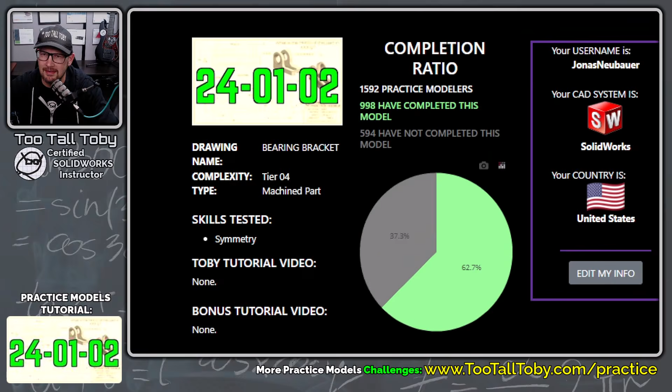In today's SolidWorks intermediate tutorial, we're going to take a look at tootalltoby.com. We're going to log in and head on over to the Practice Models app. Once we go into the Practice Models app, we can see here in our last video, we completed this Tier 1 challenge. Well, in this video, we're going to complete this Tier 4 challenge. So I'm going to click here to practice. I can see that 998 people have completed this challenge. Let's see if we can become number 999.

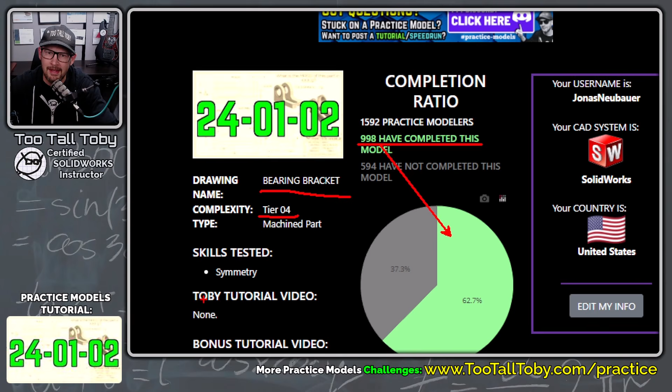The challenge is called Bearing Bracket. It's a Tier 4 part, and some of the skills tested are symmetry, so maybe we'll do some mirroring. So I'm gonna scroll down to the bottom here, click here to begin, and then click this button that says reveal drawing. We see here we've got a field for mass, we've got the clock running, and it says, what is the mass of this part in grams? So that is the question that we're gonna try to answer.

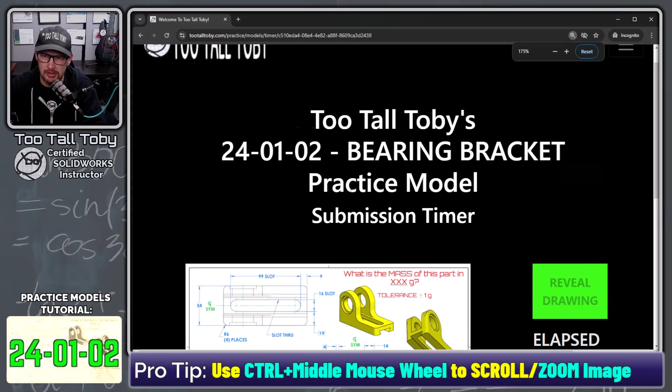Now to make this a little bit bigger, I'm gonna hold Control and scroll wheel in a little bit here, make that print a little bit easier to see. And let's take a moment and come up with a game plan for this model. I know that the clock is running, but I think it's really important whenever you're going from 2D to 3D to come up with a basic game plan.

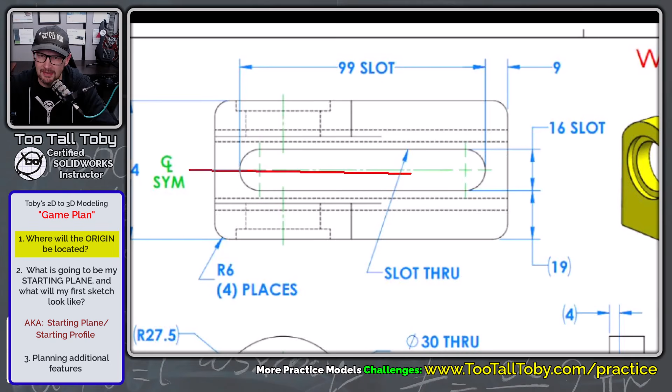So the first thing we're going to ask ourselves is, where should the origin be located for this model? In the case of this model, we've got the center line symmetry going through here, so the origin is going to be somewhere along that center line. Looking at this front view, it's safe to say that the lower corner of this front view is down here. There's a lot of dimensions coming from that location, so that's probably a good location for the origin.

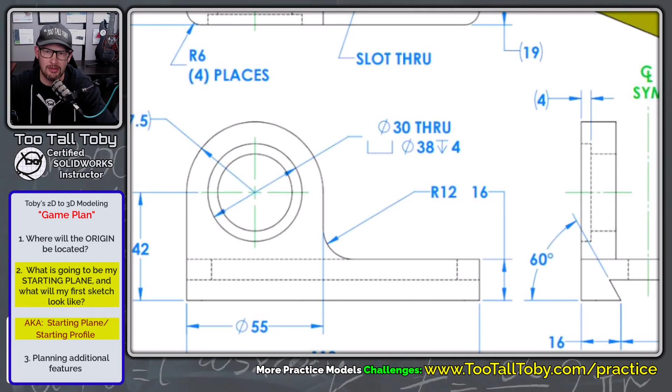The next question you're going to ask yourself is, what is going to be my starting plane and what will my first sketch look like? A lot of times we call this the starting profile. In the case of this model, I think there's two obvious choices. The first choice would be to create a sketch that looks something like this, and then extrude that sketch along the part. The second choice would be to create a sketch that looks like this, and then extrude that sketch up. So that would be a rectangle which is 54 millimeters by 118 millimeters.

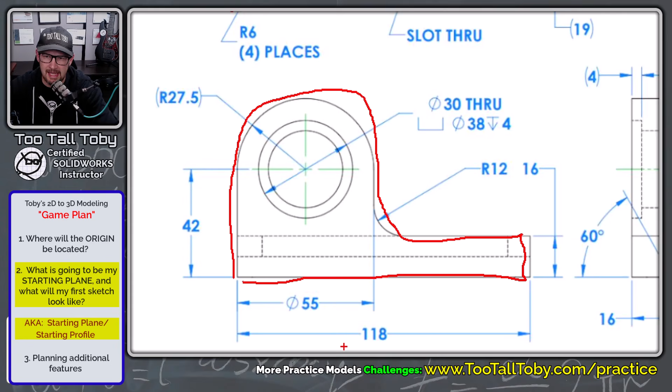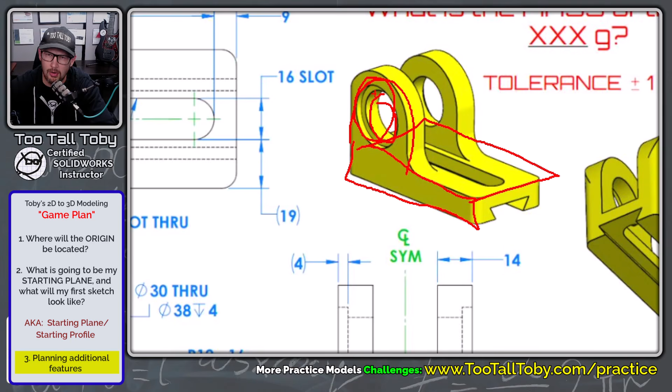The reason I mentioned those dimensions is because that's the route I'm gonna go. I'm gonna create this base shape first. Then I'm gonna create this tombstone shape sticking up here. After that, I'm gonna create this hole and then this counterbore. Then I'm going to take the tombstone, the hole and the counterbore, and use a mirror command to mirror that across.

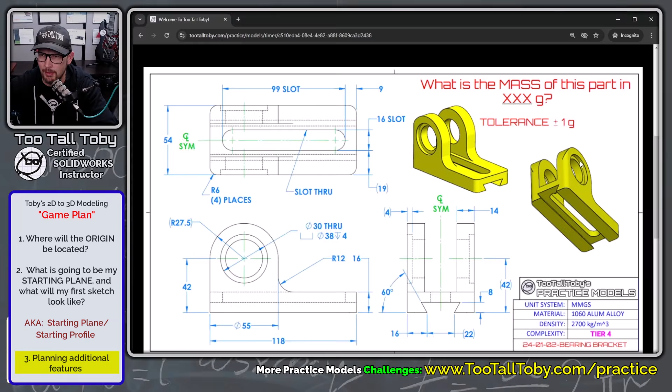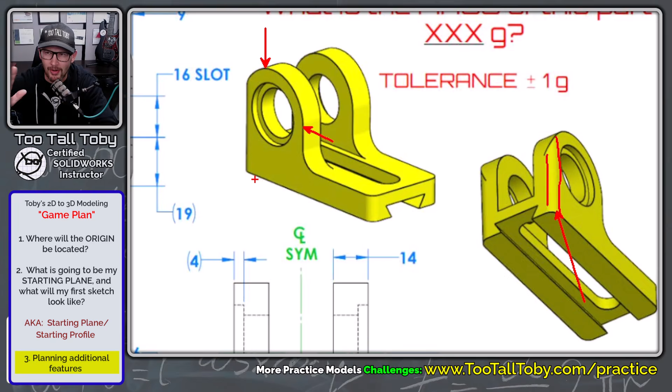Next, I'm going to add my cut extrudes: a cut extrude down here and a cut extrude here for the slot. The final features will be the fillets. These fillets are a little bit tricky, because we've got a fillet running up this sidewall. It starts here and runs up this sidewall, but then it just stops, and this remaining edge is sharp, and this edge here is sharp. In most CAD programs, that's going to be a challenge because of what's called tangent propagation in the fillet command. But we'll talk about that once we get to that part.

We've already burned off 2 minutes and 30 seconds talking about our game plan. So let's take this print and move it over to our second screen. Let's get into SolidWorks. I'm going to be using SolidWorks 2022 with a fresh install, so everything is pretty much out of the box.

Nothing has been customized, and I'll kind of talk through what I'm thinking as we go through this challenge. So here we go. We're going to begin a new part here. We can either use the novice or the advanced function for our templates. I'm going to use the advanced function. I'm going to double click on my part template here.

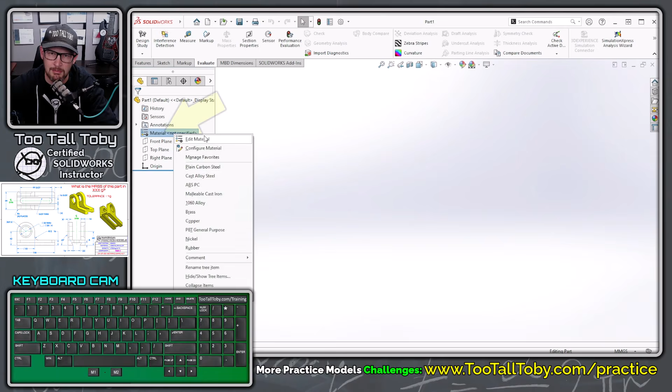Next, I'm going to go over to the tree and set my material. So in the title block, it says the material is 1060 aluminum alloy, and it says that the material has a density of 2,700 kilograms per cubic meter. So I'm going to go into my aluminums here. I'm going to choose 1060 and just confirm that the density is matching the title block, and it is. So I choose apply and close.

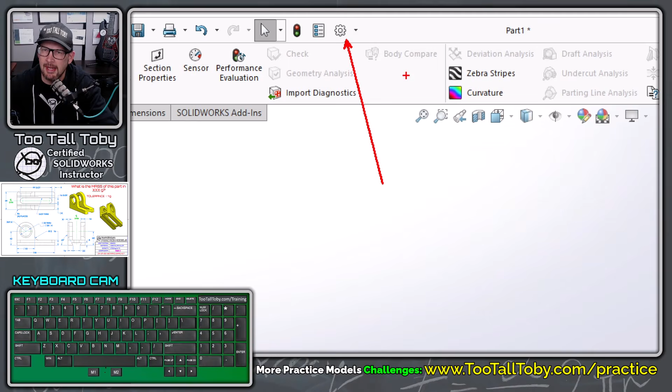And then the next thing I'm going to do is go up here to my options. Because I'm just working from the native template, I'm not sure what unit system I'm using. So let's go into options here. We'll go document properties, units, and the units here are MMGS. And that is good because this model is in millimeters. So I'm going to use MMGS here.

Now I am going to go a little bit faster on this tutorial than I went on the last one. So just feel free to pause or maybe play it back at half speed or something like that if you're struggling to get caught up. I just don't want to take too long on this tutorial.

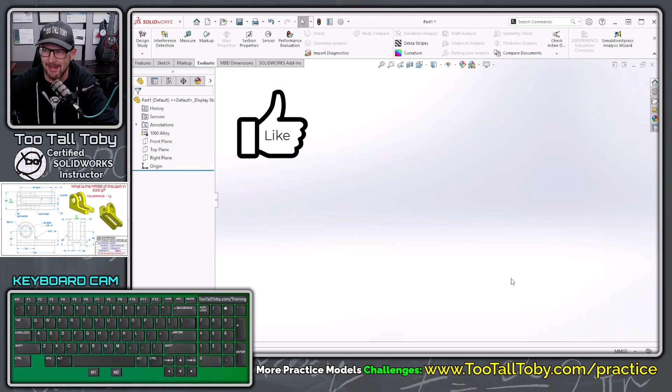So now I'm going to go to the top plane. My starting plane is going to be the top plane, begin a sketch. And I'm going to start out by sketching a rectangle like so. And then I'm going to go up and choose Smart Dimension. And once I choose Smart Dimension, I'm going to choose to dimension this line here at 54 and this line here at 118. That's what we talked about in our game plan.

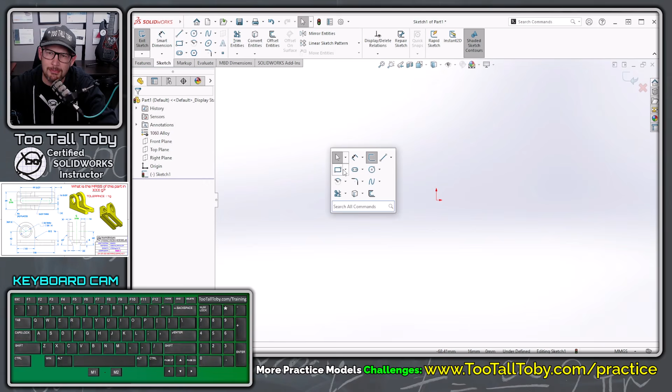Now, I just want to point out one shortcut here that I use all the time. So let me delete these dimensions. Let me delete this rectangle here. And that shortcut is the S key on your keyboard. So I press S on my keyboard and this menu shows up. And you can see in this menu, I can choose rectangle and then I can create a rectangle. And then I can press the S key again. And once I press the S key again, I can jump into Smart Dimension. And I can drop a dimension on here of 54 by 118. So another dimension here, 118.

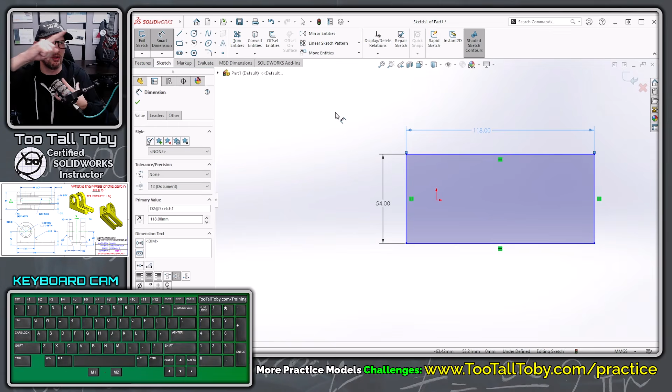So I'm going to hit escape here. And now I'm going to add a sketch relationship between the origin and this line here. And the way we add sketch relationships in SolidWorks is we pick one entity like the origin, then we hold control, then we pick the second entity like this line here, then we let go of control, and then we choose the relationship up here in this box.

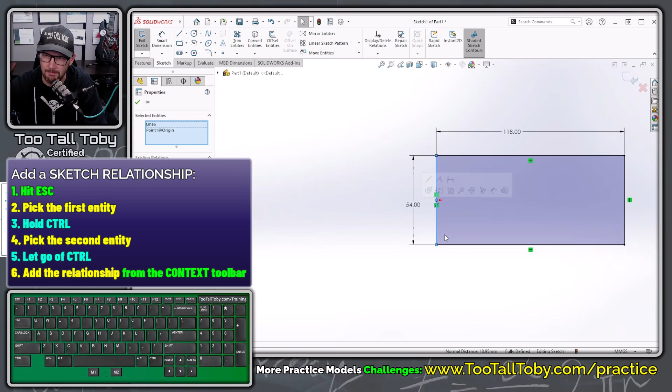So let me just show you that one more time. I'm going to hit escape. I'm going to pick the first entity, hold control, pick the second entity, let go of control, and then I'm going to come up here and choose make midpoint. And now that sketch is entirely black, which means it is fully constrained, which means we are ready to turn that sketch into a feature.

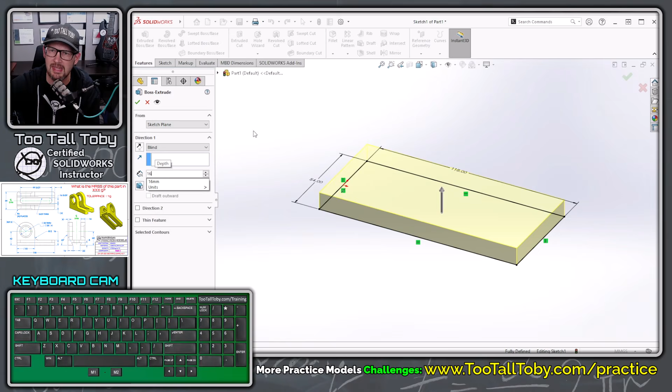So I'm going to choose features, extruded boss base. And we can see over here that the height of the extrusion begins as a highlighted field. That's another little shortcut that I use. If I'm in a sketch and I choose extrude, I can immediately let go of my mouse and then I can type in the height of the extrusion, 16, enter, enter. And now I'm done with that command.

So now I'm going to move on to my next command, which is going to be this tombstone shape. So I'm going to select this face, begin a sketch, orient my view, and then I'm going to use the line command, and I'm going to create a line that starts here at this corner, this kind of upper corner.

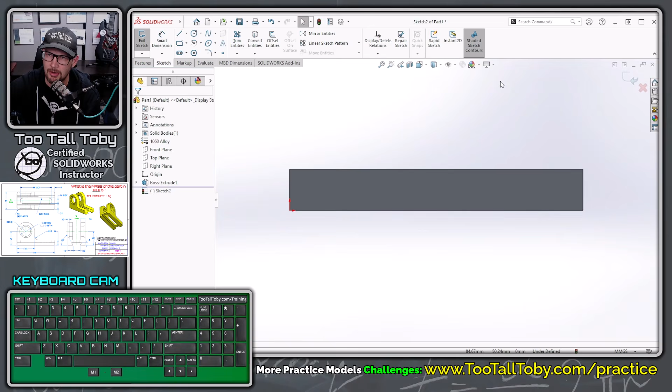I'm going to move my mouse up here. Actually, let me just hit escape here. I'm going to go into my view options, my view display options. And I'm going to turn off RealView graphics and shadows in shaded mode. And I'm also going to go into my scene option here and make this plain white. I think that'll make it a little easier to see where I'm clicking.

So I'm going to go now to the line command. So S key, line, and I'm going to choose this vertex right here to begin my line command. I'm going to just move my mouse up a little bit. I'm going to single click. And then I'm not going to click anything. I'm just going to move my mouse back over that end point. And this is a shortcut in SolidWorks where you can transition from a line to an arc.

Now, depending on the direction you come off of this line, you're going to get different results here. You can see you can get tangent, perpendicular, or reverse tangent. So again, I'm not clicking anything. Let me hit escape here. The workflow is that I press the S key, I begin the line command, I pick this point here, I move my mouse up, I pick here and pick again. So one left click, now a second left click. Now I'm not clicking anything.

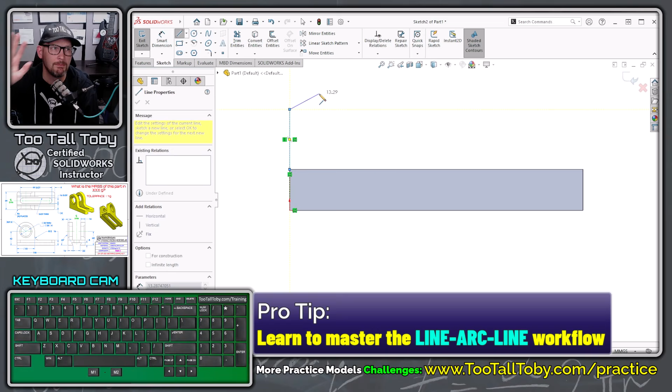I come back and hold my mouse over this end point, and now I come up and around from that end point, and you can see that I'm in a tangent arc command. So I'm going to single click here to drop that tangent arc, come straight down like this, and then come across to close off that sketch. And now I've got a nice, neatly knit, closed sketch. That is what I want.

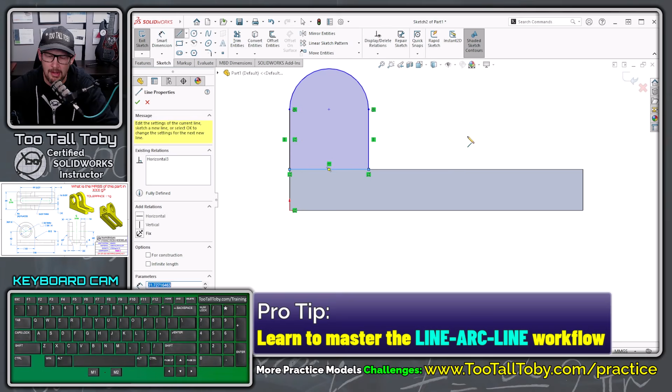So I'm going to press the S key and jump into the Smart Dimension command, create a dimension from here to here. Looks like that dimension is called out as 55. And then I'm going to create a dimension from this bottom line here up to the center of that arc, and that is going to be a dimension of 42.

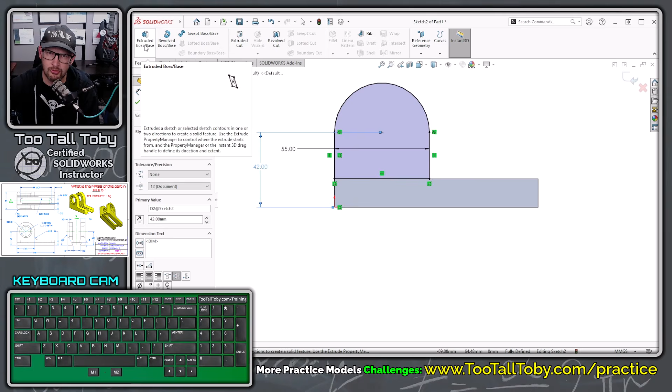And once I've got that geometry in place, I can choose Features, Extrude. And we can see here that the depth of that extrusion is supposed to be 14 millimeters. So we'll make that 14, enter. And this is going to go the opposite direction, so I'm going to use this button here to flip the direction of that extrusion. I click on this button here, and there we go. Hit the green check mark, and we are done with that feature.

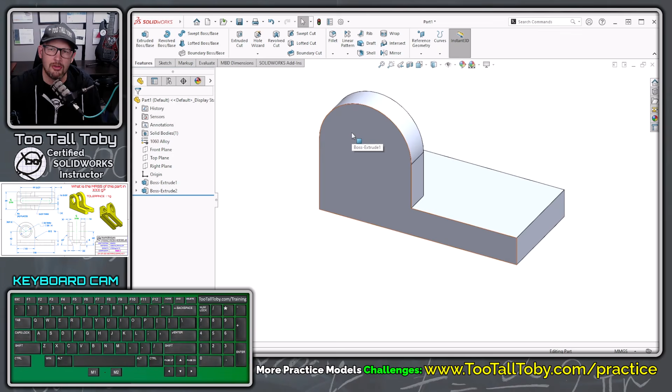Now, to create the hole that's going through this thing, I could use the Hole Wizard tool, and I could do it as a counterbore. That's probably how I would do it normally, but just in case you're still beginning your SolidWorks journey, I wanted to do this manually with 2 cut extrudes. So I'm going to pick this face here, begin a sketch, orient my view. I'm going to press the S key on my keyboard. I'm going to choose the circle command.

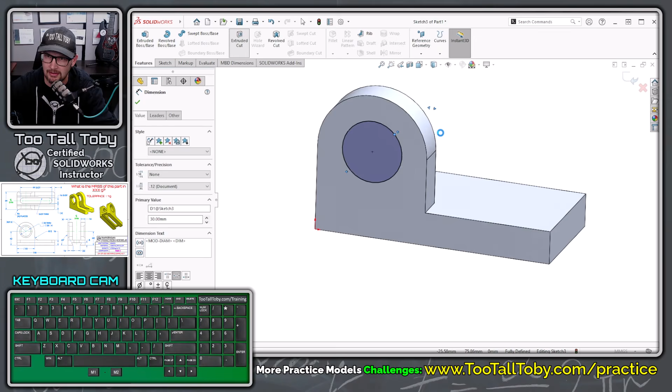I'm going to hold my mouse here over this edge, which we call waking up the center point. So after I hold my mouse over that circular edge, I can move my mouse down here to the center of that edge, single click, move my mouse, single click again, and then I'm going to press the S key and go to Smart Dimension and create a dimension here of 30, enter, and then I'm going to choose the Features command, Extruded Cut, and this extruded cut is going to be through all.

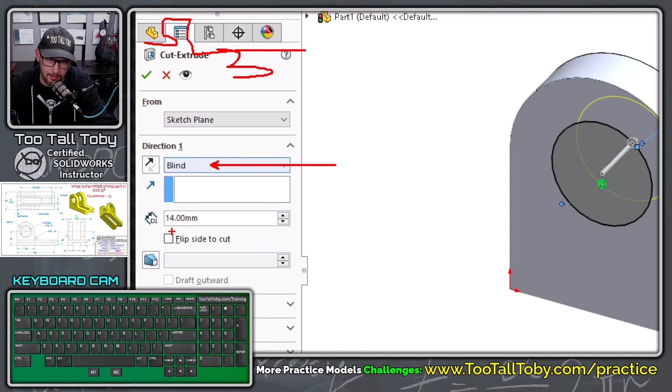So this is what's called your end condition when you're working in an extrude command, a cut extrude or a boss extrude. Here we're looking at what's called the property manager, all the properties of this cut extrude. And one of the properties is the end condition. Currently that's set to blind, which means that we type in the depth, but we're going to change that end condition to through all, and hit the green check mark. And there we go. There's a nice hole going through that entire model with a diameter of 30.

And so now I'm going to pick this face, begin a new sketch, not edit sketch, but begin a new sketch, orient my view.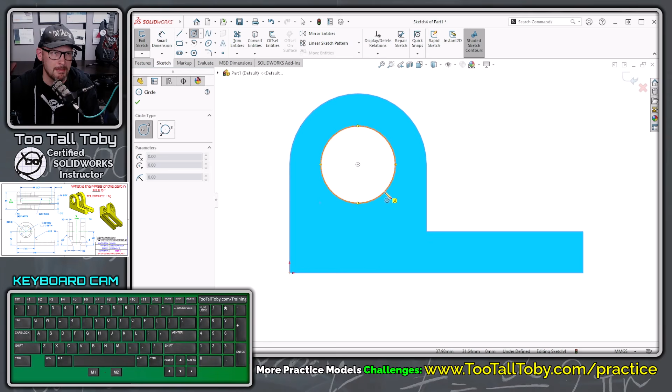I'm going to press the S key, go to the circle command, going to wake up the center point. So I just hold my mouse over that circular edge. Then I can lock in on that center point, come out here with a circle, and then I can press the S key, Smart Dimension, and put a dimension here on this circle. And that dimension is going to be a diameter of 30.9, enter.

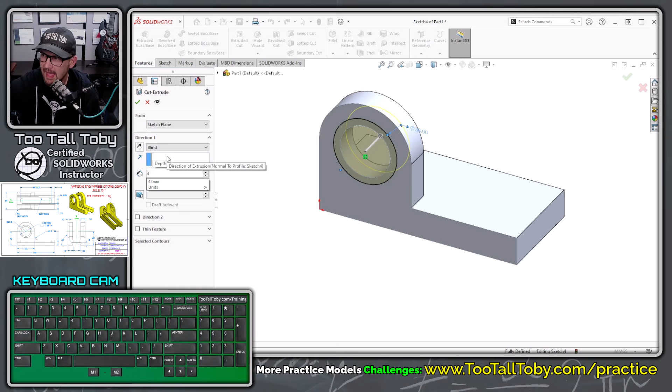And now I'm going to go to Features, Extruded Cut, and this is set to through all. I want to change that back to blind. And once I change that back to blind, the depth is highlighted. So I'm just going to type in the depth here of 4, enter, enter. And that gives me that counterbore shape, the through hole, and then the larger diameter that's only going down to a certain depth of 4 millimeters. And so now I'm ready to mirror that geometry over to the other side.

Now this is a time when it could be very useful to rename your features. Probably wouldn't want to do this in a speed run, but if you're modeling parts for your coworkers, you're going to want to rename your features. So this first feature here, I'm going to click on it. I'm going to press F2 on my keyboard. That takes me into rename, and then I'm going to call this one Rect Base, and then I'm going to click this feature here, the next feature, F2. I'm going to call this Tombstone Boss 1.

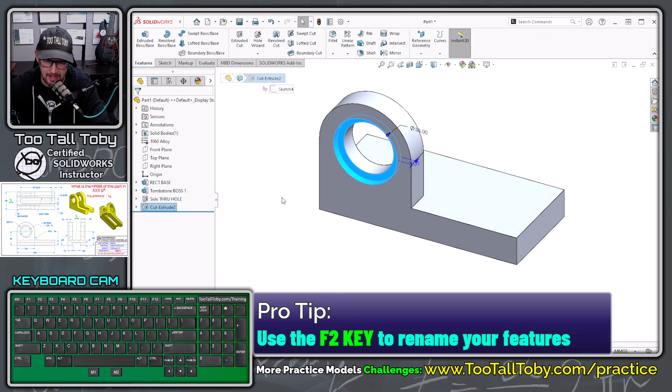And then I'm going to click on this feature here, Cut Extrude 1. I'm going to say F2. I'm going to call that Side Through Hole. And then I'm going to click on this feature down here, and I'm going to say F2, and I'll call that Side C-bore or Side Counterbore. Now you can name these features whatever you want, but it's good to name your features. It helps you, it helps your coworkers, and it's going to definitely help us now when we go into the mirror command. So here on the Features toolbar, we're going to choose Mirror.

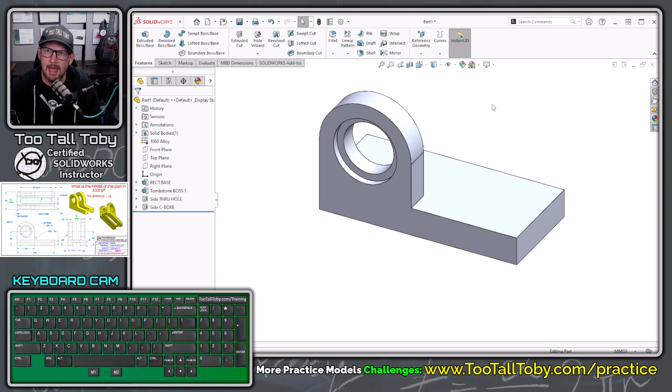And once we choose Mirror on the Features toolbar, we're going to say that our mirror face plane, I'm going to go in here to this flyout menu, our mirror face plane is going to be the front plane. Then I'm going to skip this second box here. You might not have this if you have an older version of SolidWorks. But I'm going to skip down here to where it says Features to Mirror.

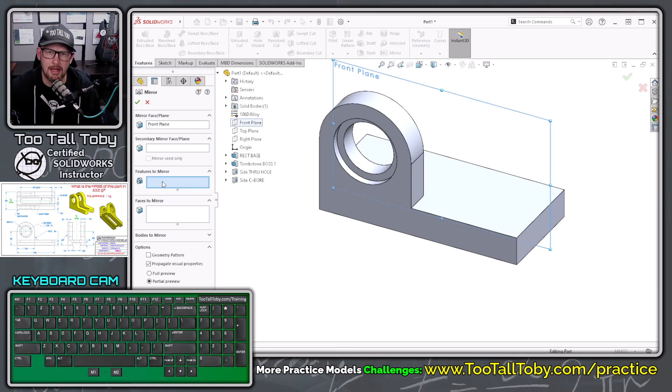And the features that I'm going to pick from the tree. And it's now very easy for me to select these features. Tombstone Boss 1, Side Through Hole, Side C-bore. Very easy to select them because of how they're named. And so I hit the green check mark, and look at that. We've created that nice mirror of those features. So now I'm ready to start adding in some more cut extrudes.

Normally the order in which you create features is your boss extrudes, then your cut extrudes, then draft if you have it, and then your fillets. So we did our boss extrude first. Now we did our cut extrudes with these holes here for the C-bore. Let's do another couple of cut extrudes. So I'm going to pick this face here, begin a sketch, orient my view.

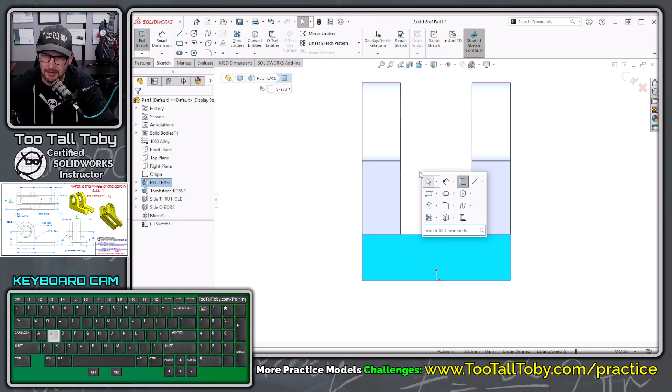Now I'm going to press the S key, begin the line command. I'm going to start here at the origin, and I'm going to come over here with a line. I'm going to come up at an angle with a line. I'm going to come back over here directly above the origin with a line, and then I'm going to bring my final line down here back to the origin. So there you see we've got a nice, neatly knit closed sketch.

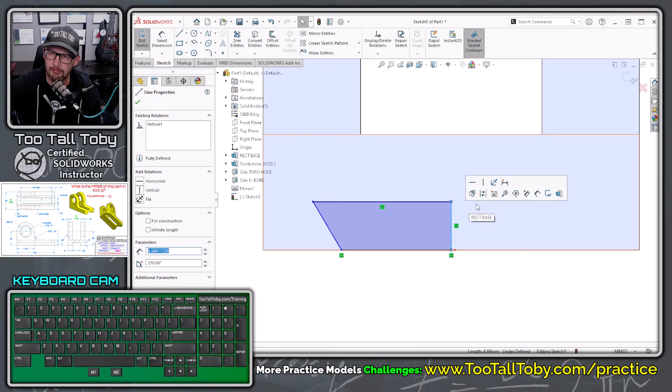I'm going to hit escape here, and then I'm going to pick on this vertical line that's coming up from the origin, and I'm going to choose to convert that to construction geometry. Construction geometry means we're not going to use this line when we go to do our cut extrude. So now the sketch is open. It's got line, line, line, but then this is not really a line here.

Well, what we can do is we can select all 4 of those lines. I usually do this with a window. So I start out over here on the left, and I just drag in the background, and I drag over here to the right. That selects all 4 of those entities, and then I can come up here to the sketching toolbar, and I can choose Mirror Entities.

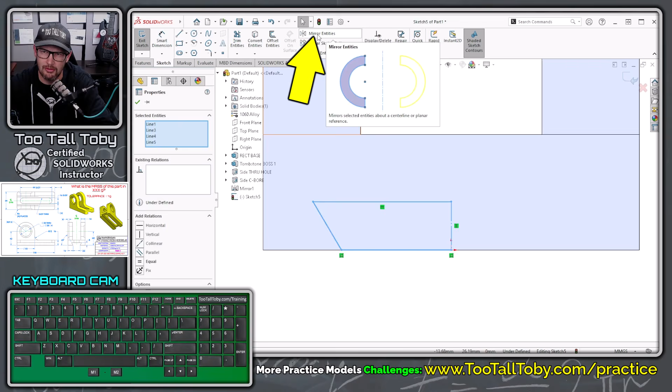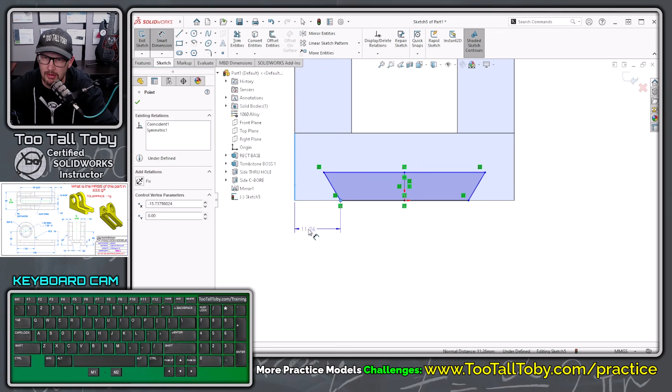Mirror entities mirrors that right across. Now we've got that sketch for that keyway that we're cutting across the bottom of this part. So for these dimensions, what we're going to do is we're going to add the dimensions here for Smart Dimension. This is going to have a distance from the edge of the model to this point here. That distance is 16 millimeters. Then if we click on this line here across the bottom, we can see that that distance is 22.

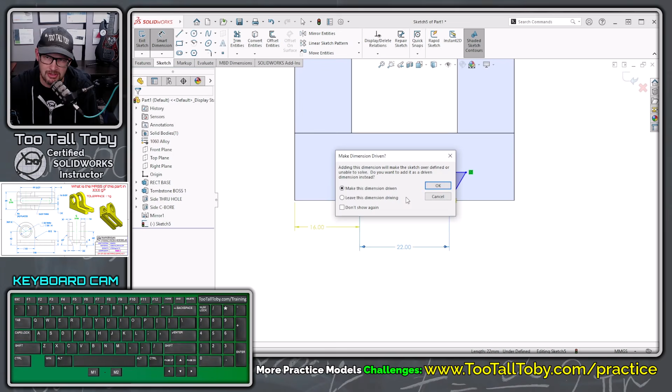Now, when we go to drop that dimension, SolidWorks says, adding this dimension will make the sketch over-defined or unable to solve. Do you want to add it as a driven dimension instead? And I'm going to say, yes, make this dimension driven. And so what that means is if I change the 16 dimension, let's say I change that to 20, then that driven dimension automatically changes. So it's kind of like a reference dimension in a sketch. It's useful for keeping track of important dimensions, and it's useful for double checking to make sure that we're matching the drawing. This is 16 and this is 22, and that's what we see on the drawing, so that is good.

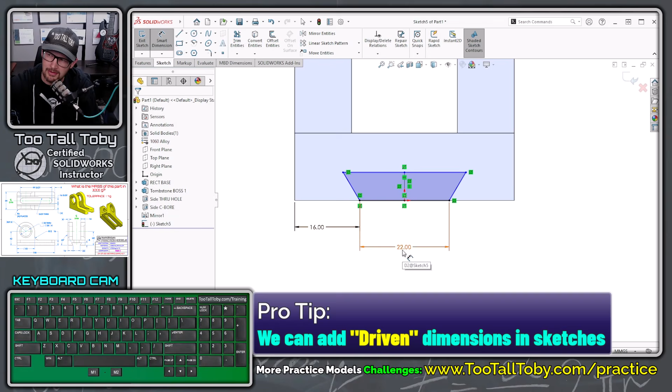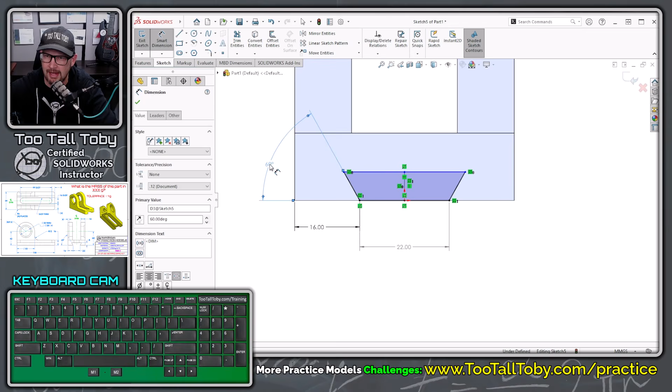And so now I'm going to create some final dimensions here. I've got a dimension that's going from this line down here to this angled line. And that dimension, I'm going to click in the background, is going to be 60, enter. And then from this lower line to this upper line, and that dimension is going to be 8 millimeters. And so now that sketch is all black or fully defined.

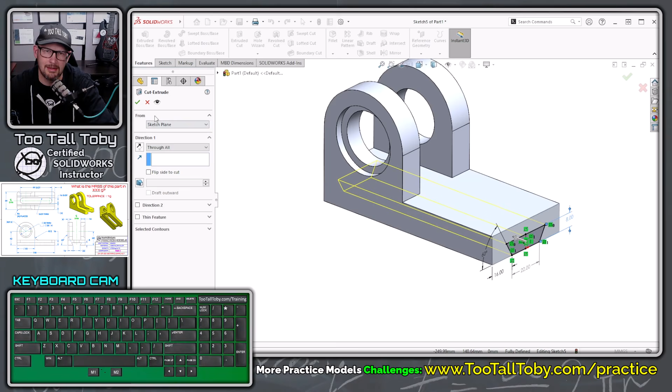That means we can jump into the command Features, Extruded Cut. So we go to Features, Extruded Cut, and the end condition for this feature is not going to be blind. The end condition is going to be through all. That way that cut goes through the entire model. And so we hit the green check mark, and look at that. That looks great. And so now we need to add one more cut extrude, the slot from the top view.

So select this face, begin a sketch, orient the view. And now we're going to go to the slot command, and we're going to create a slot here that goes from here to here. You can see I'm horizontal to the origin. So that center line is now locked down, but now I need to add my dimensions. And for my dimensions, this is kind of a cool shortcut in SolidWorks. We need to create a dimension here that goes from this edge of the model to this arc, and that dimension needs to be 9 to the point of tangency.

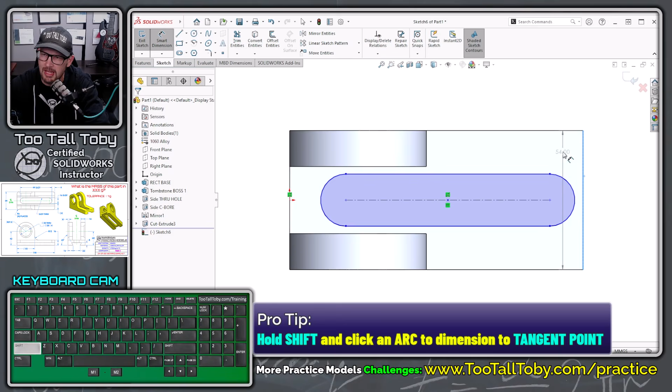So the way we do this is we begin the Smart Dimension command. You can see we're in the command here. We pick on this edge here, and then we hold Shift on our keyboard. So see, if I just pick this arc here, the dimension goes to the center. That's not what we want. So I'm going to hit Escape. I'm going to choose the Smart Dimension command. I'm going to pick this line here. Then we're going to hold Shift on our keyboard. And then when we pick this arc, look at that, we get the dimension to tangency. And that's what we want. So we click in the background and we type in 9.

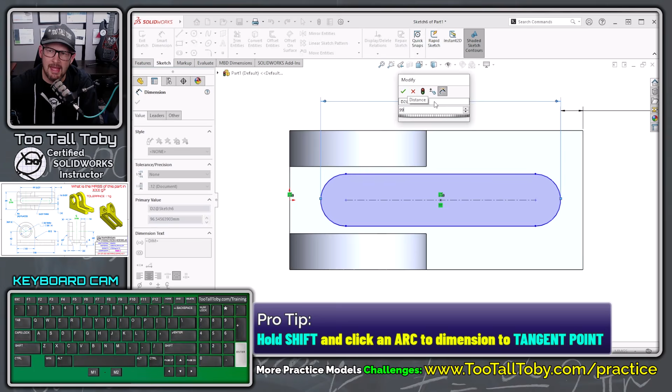And then we can hold Shift again, click this arc at the point of tangency or near the point of tangency, and then pick this arc over here near the point of tangency. And then we can let go of Shift. So I was holding Shift that whole time, click in the background, and then we can type in 99, and that's the dimension from tangency to tangency for that arc.

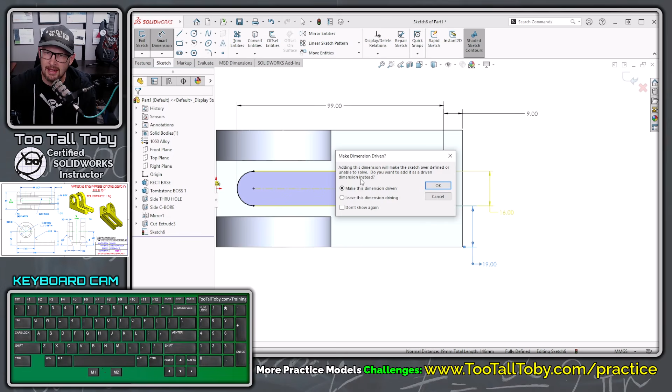And so now I just need to add that one final dimension from this line to this line, and that dimension is 16. And then if I wanted to use that driven dimension trick again, I could add a dimension from this line to this edge of the model, and I could say I want to make that dimension driven. And there we go. We can see that dimension is 19. You can also click on that dimension. And then if you look over here in the property manager for that dimension, there's a button down here, this button right here.

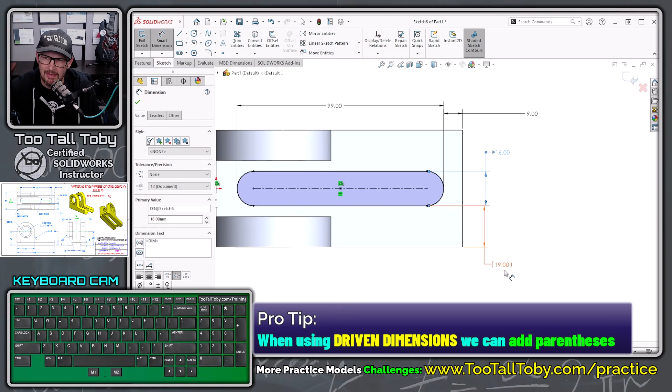It's way down here where it says dimension text in the properties of that dimension. And that button adds parentheses. So, if you wanted to remind yourself that that's just a driven dimension, that's a good way to do it. You can just add parentheses around that dimension with this button over here. So now we've got that sketch fully defined.

Let's go to the command Features, Extruded Cut. And our last cut had an end condition of through all. And so starting in SolidWorks 2022, SolidWorks remembers the end condition. I actually don't like this. I prefer the way it worked in the old days, but it's good to know what the differences are and when they happened.

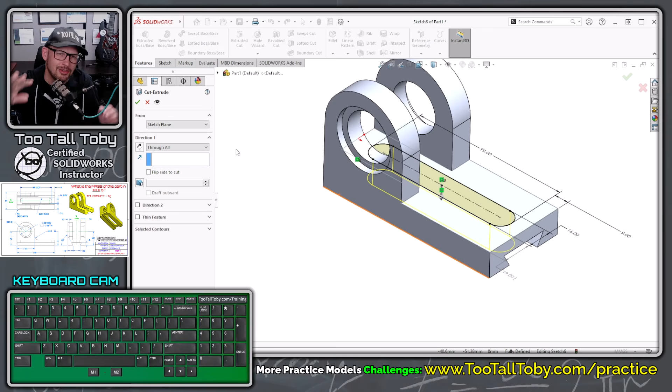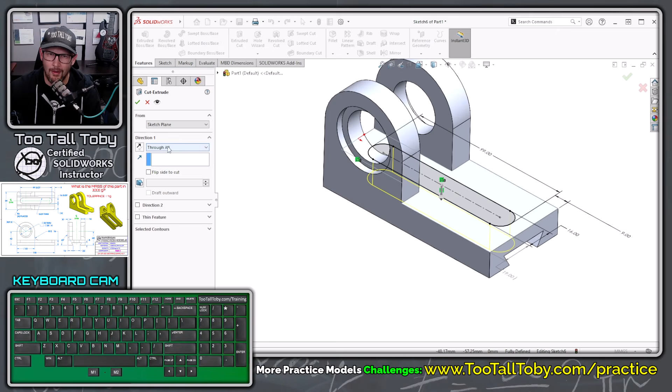In 2021, this didn't happen, but in 2022, when you pick an end condition, that end condition kind of sticks. And so now this cut extrude is also through all for the end condition. It does happen to work out this time, so we'll be happy about it. So we say through all for the end condition. We hit the green check mark, and now we are on to the final phase of the model.

And the final phase of the model is adding the fillets to this model. To add the fillets, we're going to choose the fillet command. So we choose fillet here. And then we're going to type in a radius of 12. So 12, enter, and that fillet is going to be applied here.

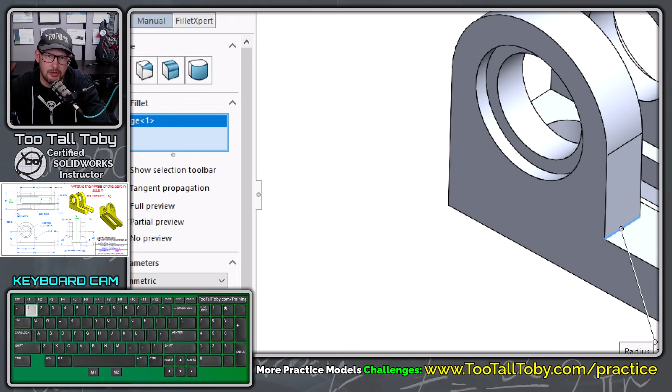And you notice I don't see a preview. Well, when you first start using SolidWorks, you have to remember to turn on full preview for your fillets. So I'm going to come over here and choose full preview, and there we go. Now we're seeing that nice yellow preview of that fillet. And then I'm going to also choose this line here, and we can see that that line is also going to have a fillet. The preview is showing us both of those fillets. That looks pretty good. So we're going to hit the green check mark.

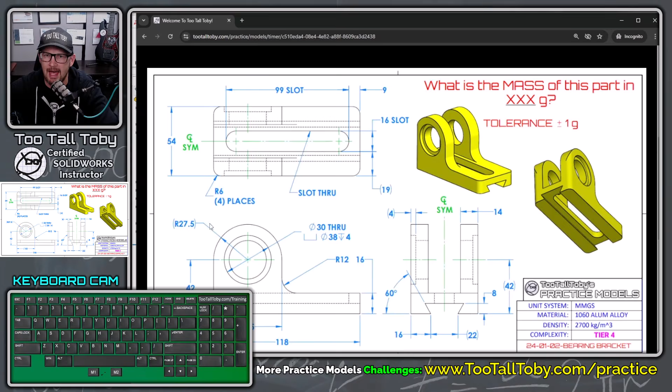Very nice. And now we are going to add the 4 fillets that are going around the outside corners. Now, if we look down on this drawing from the top, we can see that the radius of these fillets is 6. Radius 6, 4 places. So this corner, this corner, this corner, and this corner.

But if we look at these isometric views, we can see that this fillet is kind of unique. It doesn't wrap all the way around the model and run along the entire top edge. It just goes down these 4 side corners. It comes up here to this point and then just runs off and stops. It doesn't continue around this edge.

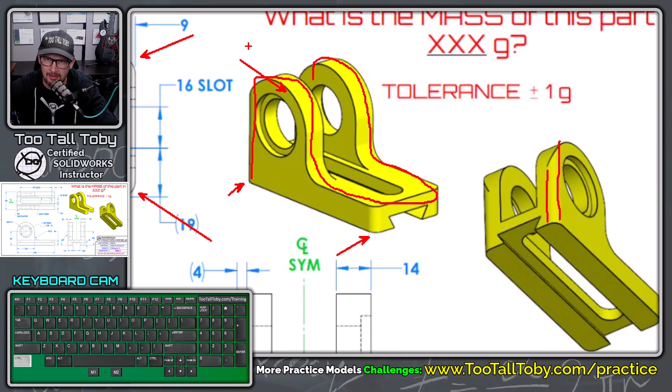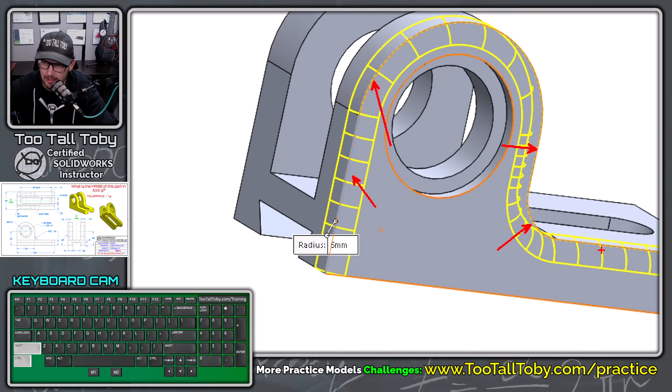Well, in SolidWorks, we click the fillet command, go to the radius of 6, and then choose this back edge here. The preview shows us that fillet is going up along this edge, and then it's continuing to run along this edge, and this edge, and this edge, because they're tangent. That functionality is known as tangent propagation. This doesn't just happen in SolidWorks, it happens in other CAD systems too.

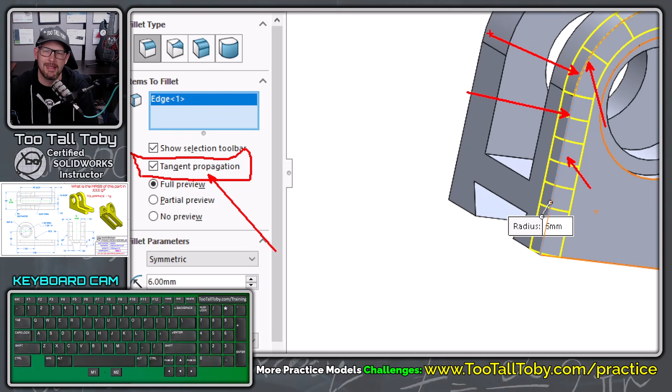If you don't want the fillet to start on this edge and then automatically continue onto the next edge because it is tangent, you can uncheck that option. So if we uncheck tangent propagation, then we see that fillet runs up and just stops, and it looks very similar to what we see in the drawing. Now, let me just pick all 4 of these fillets here, and then I'm going to press Control 5, which is a shortcut for top view.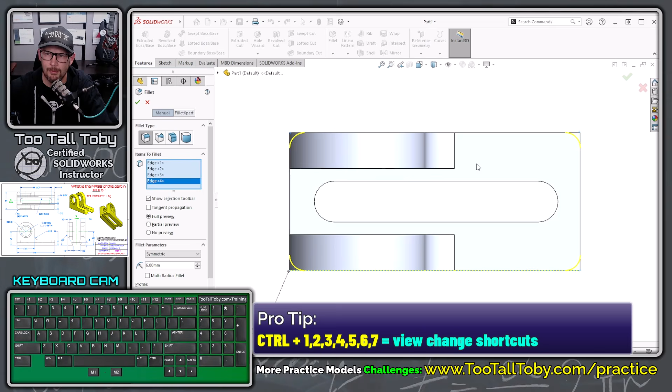The other way that we could maybe accomplish this would be to create a sketch here and sketch a line which is tangent to these 2 edges, and then sketch a line here and a line here, and then do a cut extrude. We could cut that off straight down from the top, and that would get us the same results.

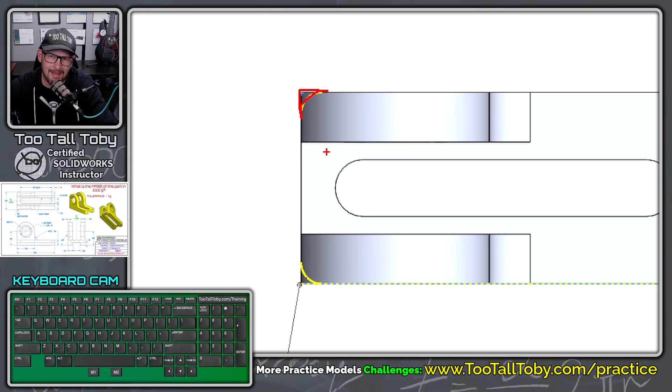Now, that certainly is an option, but I think you'll agree it's a lot better to learn what tangent propagation does and then to use that option. That way we don't have to sketch those 4 corners manually, and instead we can just use the fillet command. So that's what we're going to do here. We're going to use the fillet command. We're going to make sure that we're using tangent propagation. We're going to hit the green check mark, and there we go.

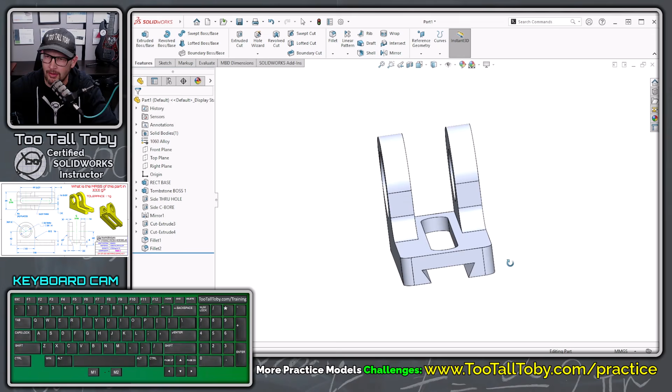There is our model. Maybe the final thing that we would do here would be to go through the tree and finish renaming these things. So this would be called mirror dash tombstone, or tombstone and holes. This would be called lower keyway. This would be called top slot, or upper slot. And then we would have this fillet here. This could be called fillet base to tombstone.

Usually when I'm naming features, I don't include the radius value. I wouldn't put like R12 there, because if I go back into that feature and I change that radius to 16, the name of the feature isn't going to update. So usually I avoid naming my features based on size, and instead I name them based on location or functionality. So rename that there. Let's change that back to 12. So that's a right mouse button edit feature to change that. And then this final fillet here, this would be called fillet 4 corners, something like that.

And then if this is for a customer, maybe you want to have it the same color as what they had. So the easiest way to change the color of your parts is just to click on this icon here, this little beach ball with the pencil. So we click on that icon, and then we go over here to the color swatch, and we can choose a different color, like this yellow color here. That's pretty close to what's on the drawing.

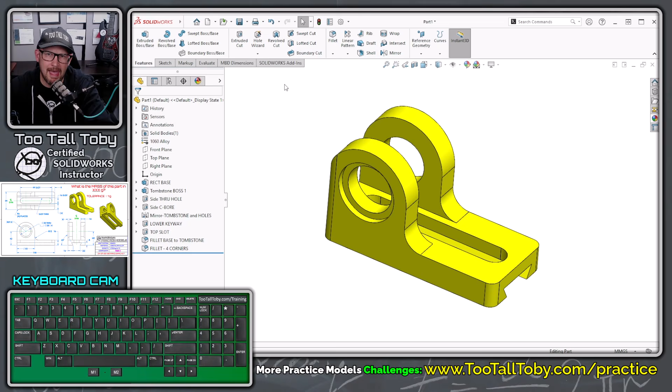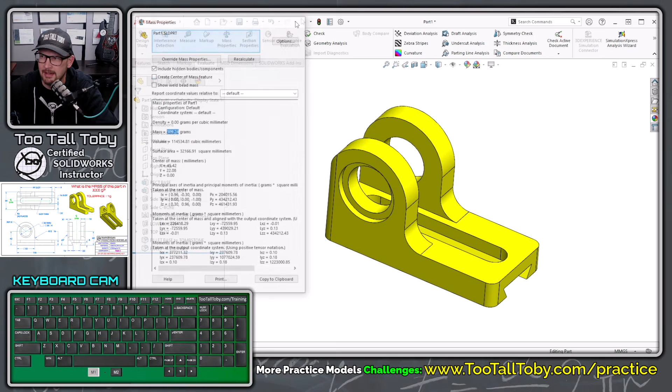And so now our final task is to measure the mass of this part. So I'm going to go in here to evaluate, and I'm going to choose mass properties from the evaluate tab. So evaluate, mass properties. And then once I choose that, I can see that the mass of this part here is 309.24 grams. Let me grab that information. I'm going to do a right mouse button, copy, and then we're going to come back here to our challenge in the Practice Models app.

I'm going to roll out of this here. I think last time I did not submit an incorrect answer. So just so you can see what that looks like, if I type in 699 and I press enter, it says incorrect. Your answer is incorrect. It is not within the specified tolerance. The clock is still running. So that answer was incorrect. Let's put in the correct answer now.

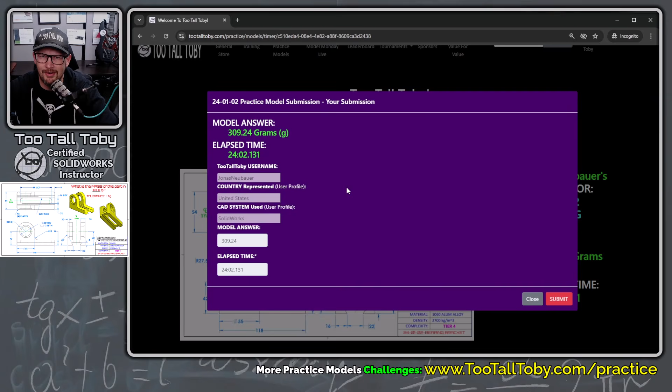So I'll close out of this. I'm going to put a Control V for paste, and then I'm going to press enter. And now this time we get that purple box. That's what we want. That tells us that we did it correctly. And so I'm going to choose submit here. And now we see that we have 999 people who have completed this model. So getting that purple box lets us know that we did complete it successfully.

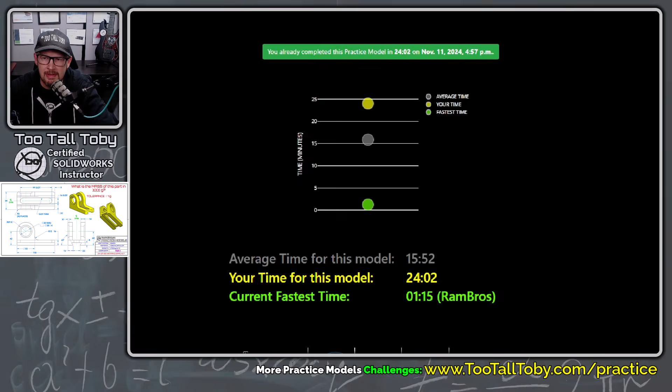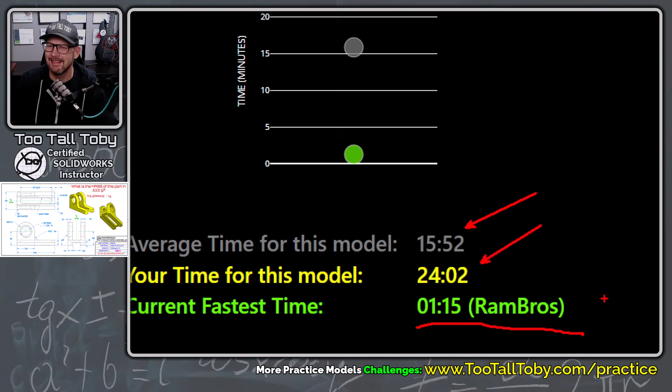And now if we scroll down, we can see some additional metrics for this model. So it looks like the average time for this model was 15 minutes and 52 seconds. It looks like I was able to complete it in 24 minutes. So I'm a little bit slower than the average modeler. That's okay. I'll get better with time and with practice. And it looks like the fastest person to complete this model was RamBros in 1 minute and 15 seconds. That is insane. But RamBros is currently the 2024 world champion of 3D CAD speed modeling. So it does make sense that he is the fastest. He's a Fusion 360 user.

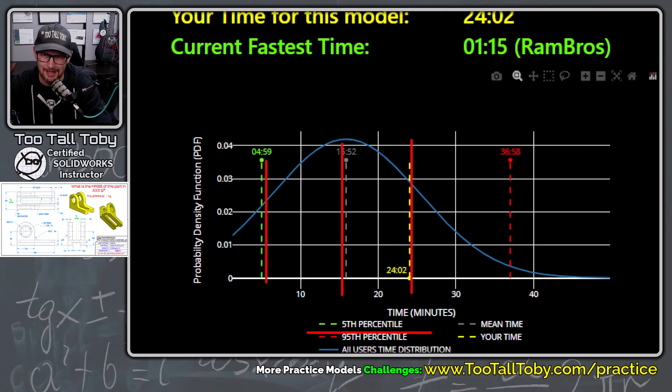So we can see here that anything under 4 minutes and 59 seconds would be in the top 5 percentile. So if you're able to get your time down under 5 minutes, that is awesome. Good on you. And again, we can see here kind of the average time, 15:52, and then my time laying a little bit on the other side of that bell curve. I'd rather be over here on this side, but hopefully with some practice, I will get there.